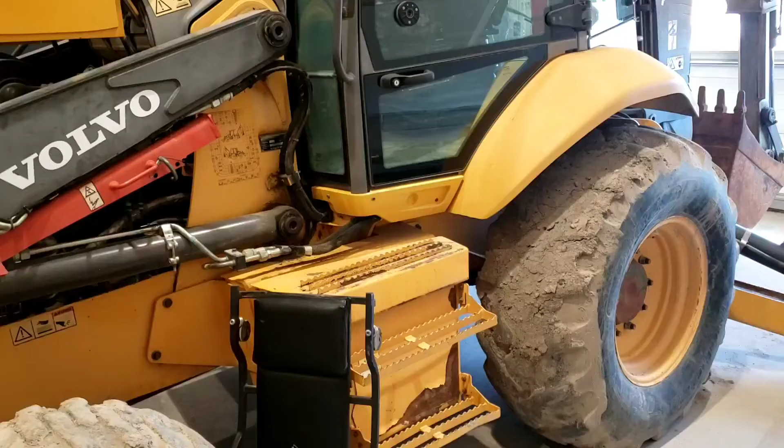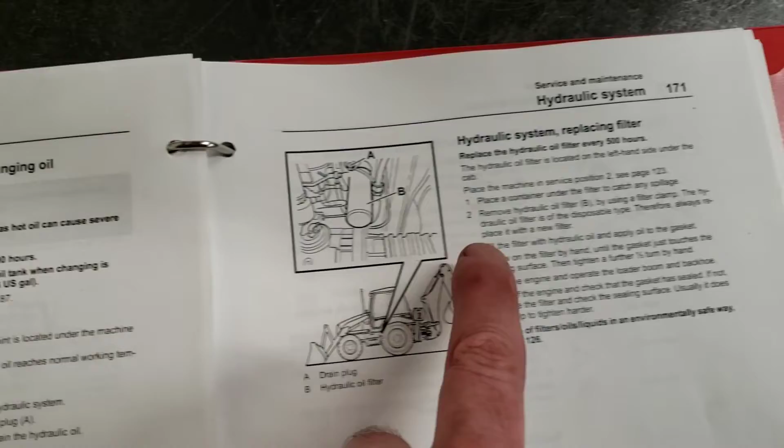So the machine I've got in the bay today is a Volvo BL70. While we're talking about hydraulic system maintenance on mobile equipment, I want to talk about oil and filter changes first. I'm looking in the operator's manual for that machine. It says to change the hydraulic oil every 1,000 hours, and then it talks about changing the hydraulic system filter, which is a spin-on element on this Volvo BL70.

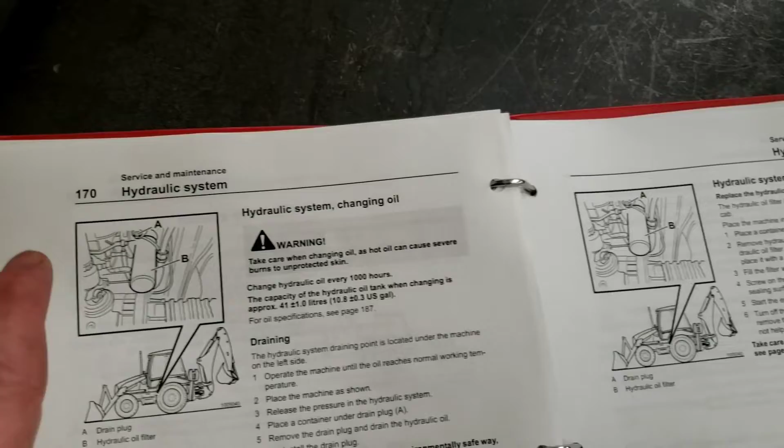It says to change that filter every 500 hours, so we're going to be changing the filters more often than the hydraulic oil. This is very common on mobile hydraulics, and quite often these are the intervals: you change the hydraulic filter every 500 hours, and every second filter change you're also going to dump the oil out of the tank.

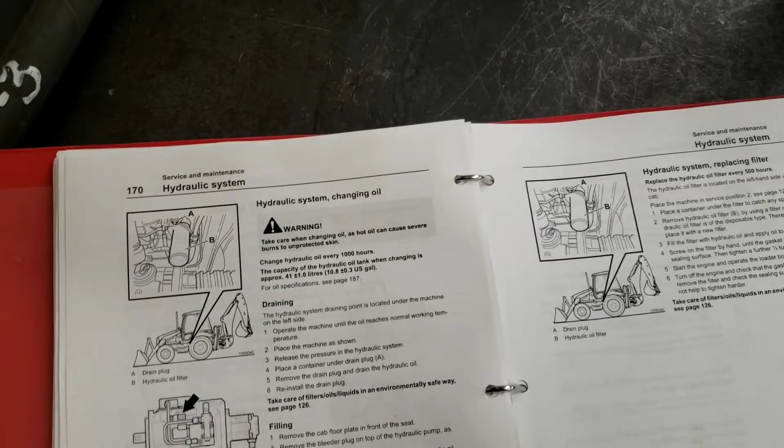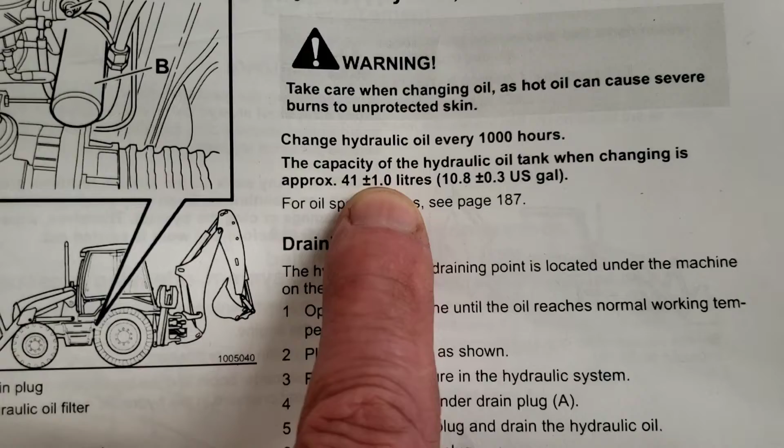Now, how much oil is in the tank versus how much is in the machine? The hydraulic tank has a unique setup on this machine - it's got an upper and a lower tank, but in combination those two only hold 41 liters of oil. So when we do that change at 1,000 hours, we're changing what's in the tank. We're not changing everything in the machine, because there's probably at least another 40 liters in all the cylinders, hoses, oil cooler, and the pump itself.

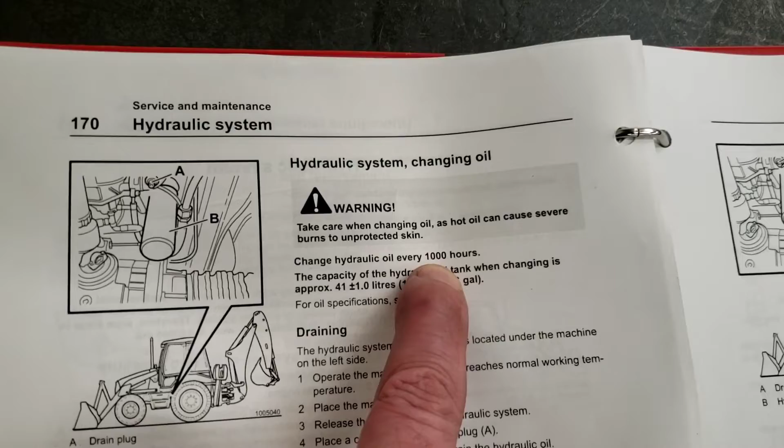So we're probably changing about half of the oil every 1,000 hours, and the objective there is that over the lifespan of the machine, the overall cleanliness of the hydraulic oil will be sufficient for long-lasting components.

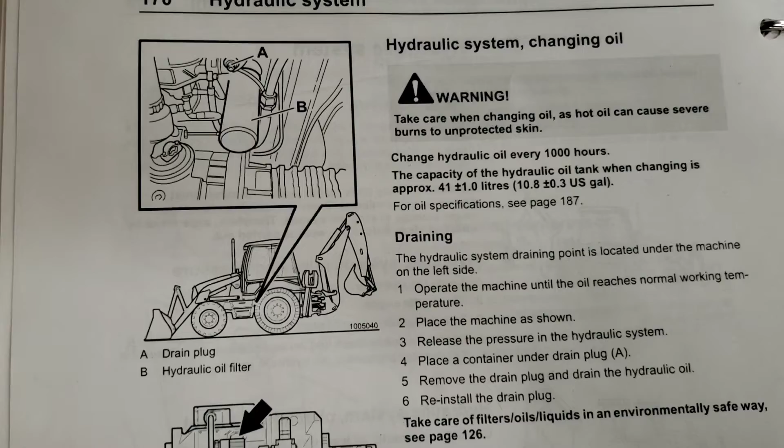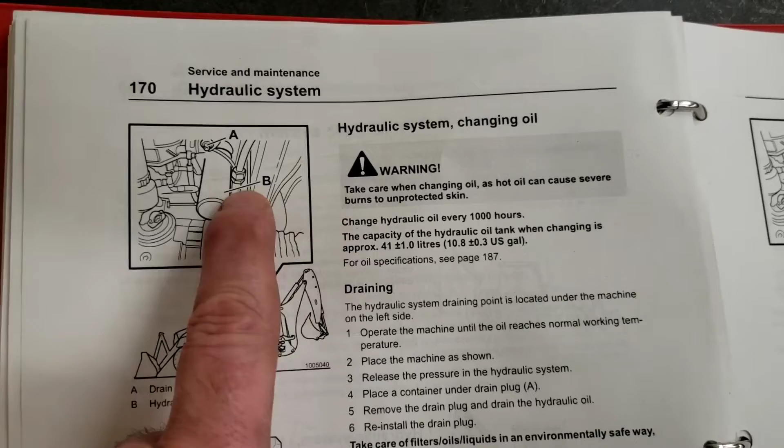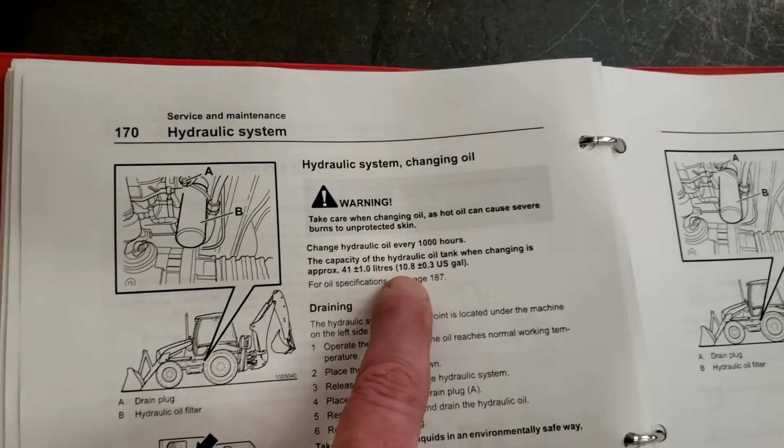Now, if you do scheduled oil sampling, your results may indicate that you need to change that oil more frequently, or you may get into a scenario where you'd want to run the machine after an oil change for a while, then maybe change it again. Because again, we need the oil to circulate through all the circuits, get back to the tank, and it's just by a process of random chance that a particular molecule of oil may end up going out during that change. But overall cleanliness with that maintenance schedule should be maintained.

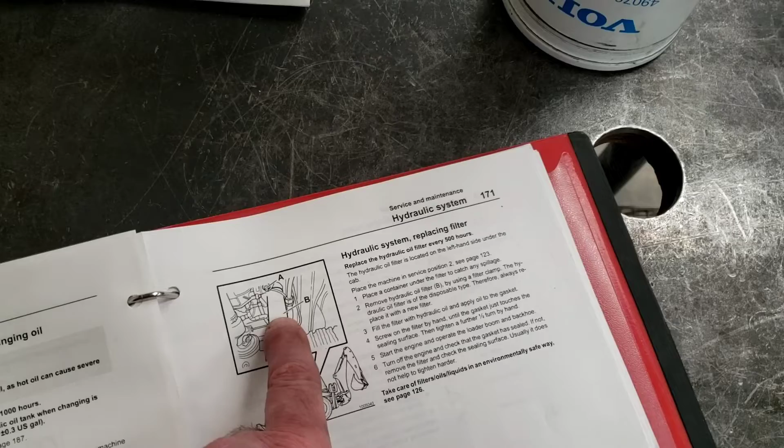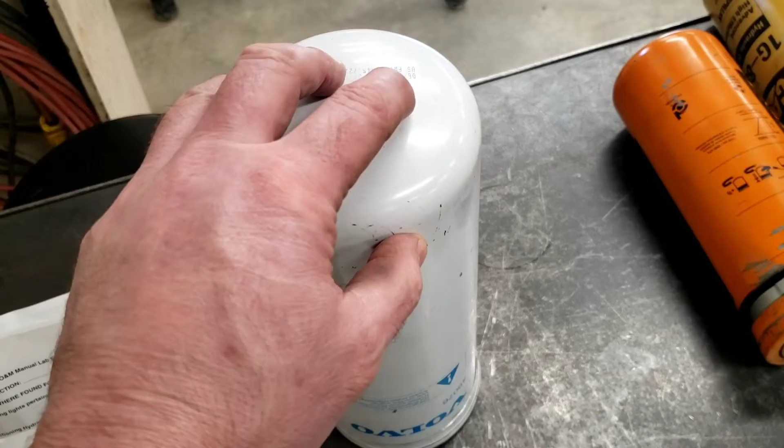Why are we changing the oil and the filter at different intervals? Well, this machine, our BL70, has what's known as a full flow return filter behind the rear axle underneath the machine. There's a spin-on element - I'm going to guess it's about a 40 micron element. It's designed to grab 40 micron and larger size particles, which are particles you can see with the naked eye.

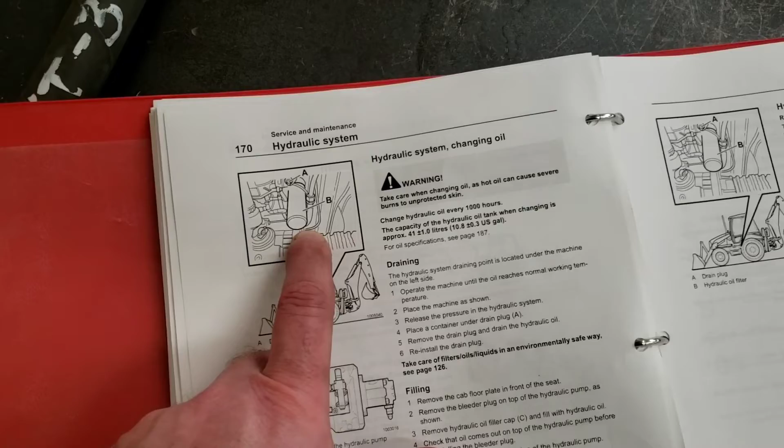So why are we changing the oil at all? Hydraulic oil actually doesn't wear out, and often when you are changing it, it looks pretty good - it almost looks like new oil you're draining out. The reason we're changing the oil at all is so we can get the particles that are smaller than the filter will catch out of the system.

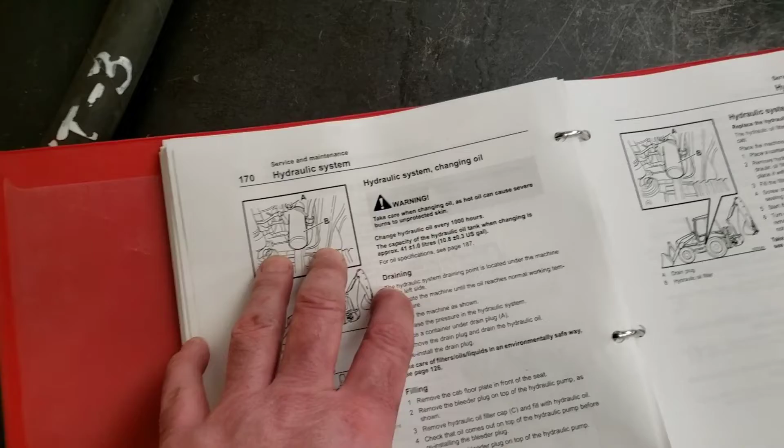So particles below 10 microns in size may do some damage in the system - 20 microns for sure, 30 microns. If the filter's only grabbing 40 micron particles and larger, it's not 100% efficient, it's not grabbing them all. But we've got to change the oil periodically to get rid of the smaller particles. So that's why we change the oil in a hydraulic system - to get rid of fine contamination.

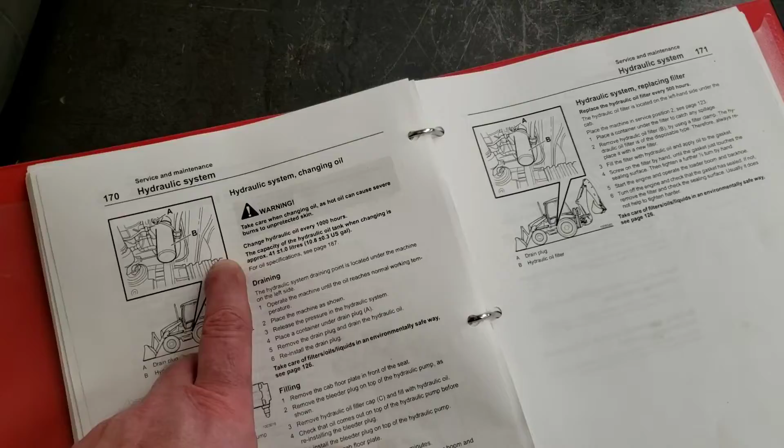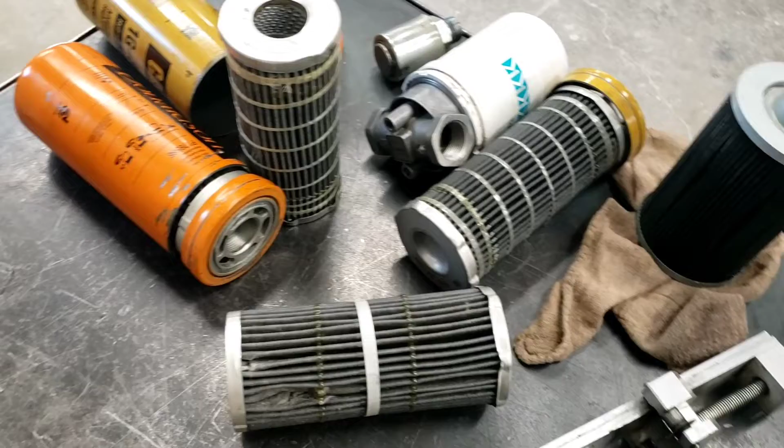So that's a good reason for doing oil sampling. I like to cut filters, use a filter cutter, and cut the old filters open to have a look on the outside of the pleats. I've got lots of filters I've cut open here, we'll look at in a second. But when we do that, we're looking on the outside of the pleats to see what's going on in the system - is there dirt and debris in the system?

Is there any shiny metal? We can use a magnet to figure out if we've got ferrous metals or aluminum, and we're going to look on the outside of the pleats and see what we see. But that's where we're looking for large chunks - if we've got a full flow return filter, we're looking for particles we can see with the naked eye.

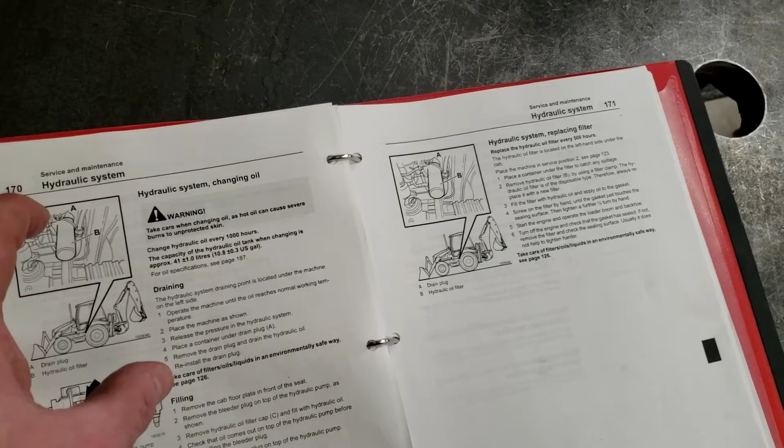Well, most oil sampling labs, when you send your sample in, the first thing they're going to do is run that through a 20 micron filter before they feed it to their machine that's going to analyze the oil.

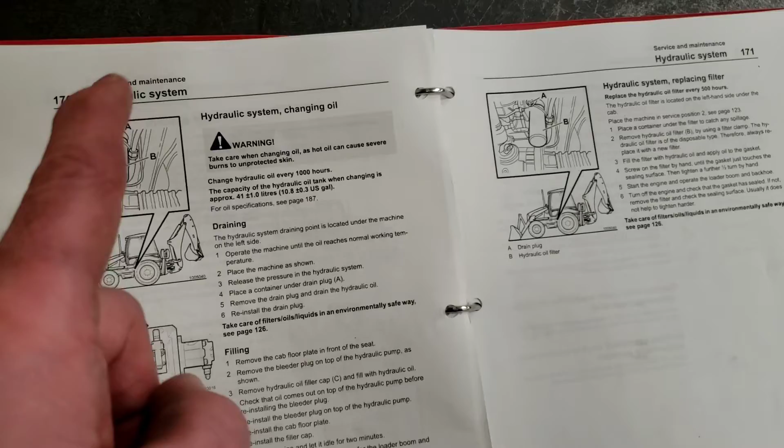Oil sampling is looking for small particles, and that oil sample report may tell you whether or not you have to shorten up your oil change interval. Whereas looking in the filter, you're looking for large particles that oil sampling is not going to catch. So one does not replace the other. I always recommend doing filter cutting and oil sampling. We're looking for big particles in the filter, and we're looking for small microscopic particles with oil sample reports.

Not all filters are full flow return filters like our Volvo backhoe loader uses. Here's a Caterpillar filter called a high efficiency filter, hydraulic oil filter. That's probably a 10 micron filter if we looked up the specs, and it probably isn't being used to filter all the oil returning to the tank like we're doing on our Volvo.

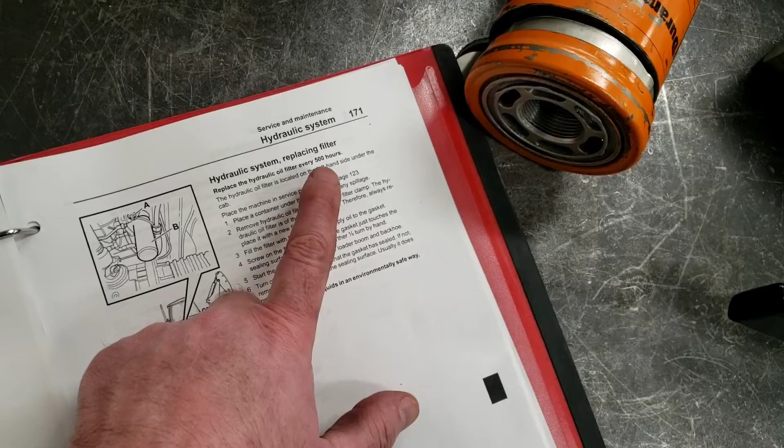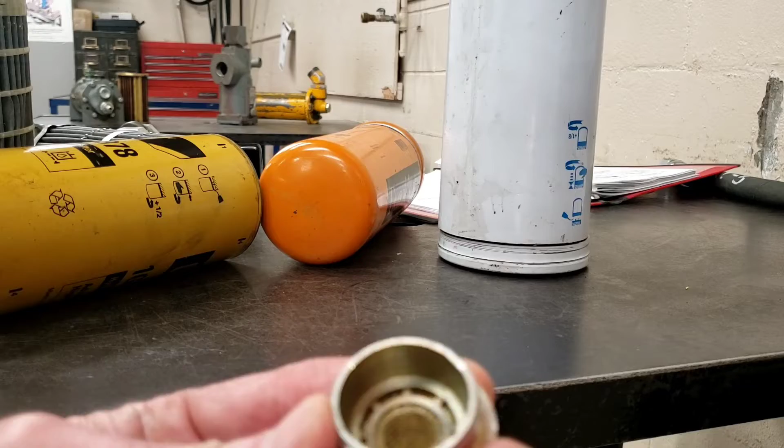Often a high efficiency or 10 micron filter will be used in a kidney loop system on the machine, where only one circuit's returning oil will be filtered at that smaller micron size. Because if all your return oil from the entire system went through a 10 micron filter, you're probably not going to make it 500 hours before you clog up that filter and it would go on bypass. So where you see finer filters on mobile hydraulics, you tend to see those in a kidney loop application. Where you see 35, 40 micron sort of size filters, you tend to see those in a full flow return situation.

Now you may also have some hydraulic filters that are just mesh screens. That may not be as obvious - that might be designed to maybe be serviced, or they may be an integral part of the machine that isn't designed to be serviced. That may just be designed to keep some debris out of specific areas of a system. So here's one that's just a wire mesh screen.

I've also got a pilot system filter off a John Deere tractor loader backhoe, and it's this style of filter that uses a sort of steel mesh inside, and you don't service it inside - you just take this apart and toss it, put a new one on. So sometimes the filters are unconventional looking, but may still have a service interval.

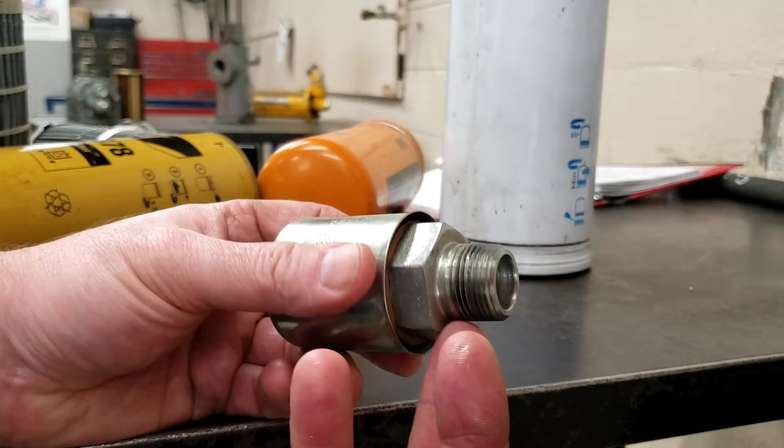And then another filter, of course, might be a breather. If you've got a vented tank or even a pressurized tank, there may be a breather in combination with a vacuum breaker and pressure relief, or if it's a vented tank, it may just be a breather like this, where the air coming and going as the hydraulic level changes in the tank has to move through this breather so we don't draw air in with incoming dirt in with incoming air.

On our BL70, instead of it being a separate breather like this, it's actually part of the cap, the fill cap on top of the hydraulic tank. But regardless, there's generally a service interval for this, whether you take it apart and change the element inside, or you toss the whole breather and change it. On the BL70, they have you replace that hydraulic tank cap. The breather's not serviceable within the cap - you just change the cap, and that's servicing your breather.

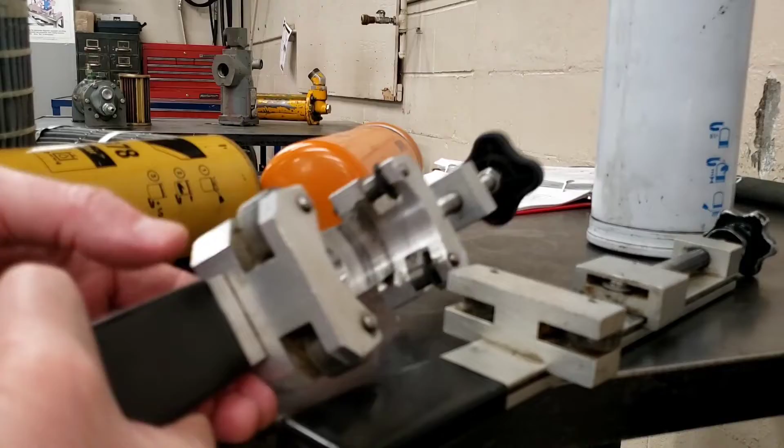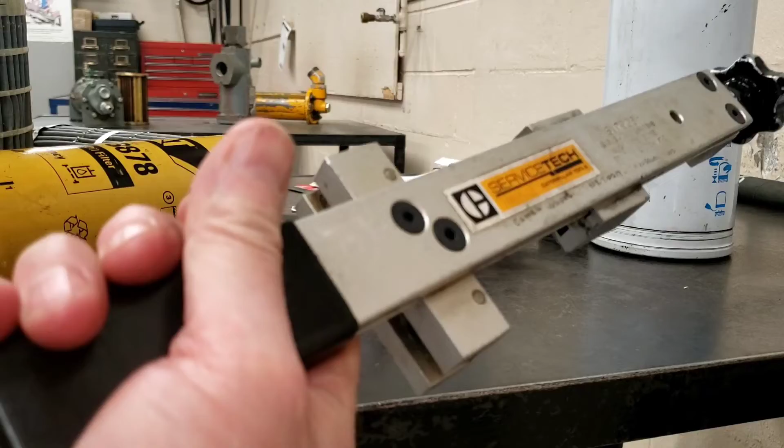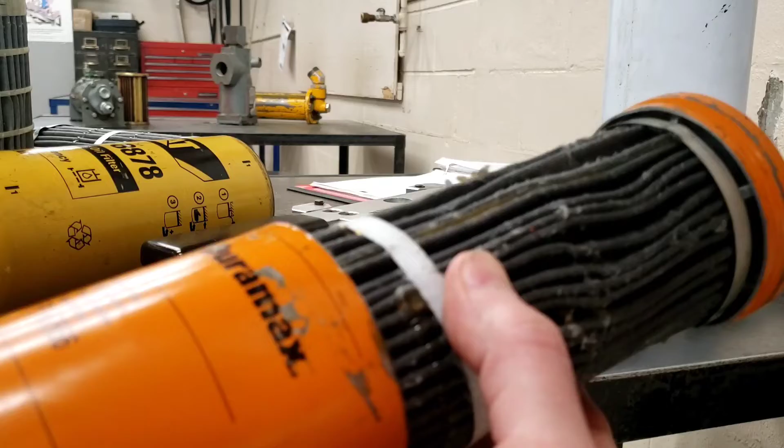When you cut open these cartridges, of course, some of our filters are not going to be a spin-on element. Some hydraulic systems use a cartridge that we would just install through a cover on the hydraulic tank or in a separate housing. But often there are spin-on types on more modern machines just for convenience. So I like to cut these cartridges open, or cut these replaceable filters open. Again, we'll find the cartridge inside, and we're generally looking on the outside of the pleats because the oil is going to get filtered from the outside in through a modern hydraulic filter. And we learn several things by cutting open hydraulic filters.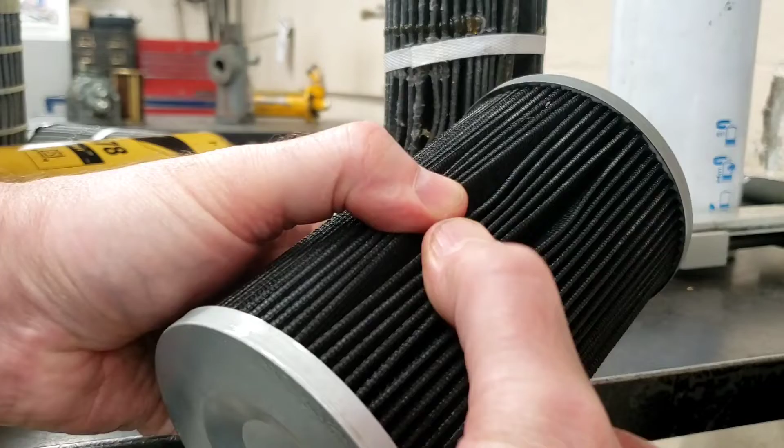We learn what kind of quality of filter we have. We can see how much pleat material there is, whether it's paper or synthetic or coated paper. We can see if there's any kind of wire mesh or screening over top of that filter material. We can see if there's glue being used to separate the pleats, or whether there's something more sophisticated like this spiral fiberglass band.

These two filters came out of this one says Donaldson, this one says Cat. They externally look very similar. They come out of the same filter plant, the FSI plant, and they're both made on the same production line, but you can see there's different levels of quality once you cut them open. So what fits may not be as good a quality of replacement.

You're really saving nothing by cheaping out on filters. If you look at the whole owning and operating cost of a machine, filters are this little sliver in the pie graph. Operator wages and fuel, and the purchase price of the machine, once you pare it all down, filters are a tiny fraction of a percent of the owning and operating cost of a machine. So trying to save a few dollars with an aftermarket filter rather than OEM is probably not doing you any favors.

So again, we're looking on the outside of the pleats for debris. We find out the quality by cutting the filters. We also get an idea of what's normal. If you're looking in the filters every time you change them, you get used to a certain level of alarm, when you see the odd flake of aluminum, or maybe a little bit of brass, or steel, or a couple flakes of paint. You'll know what's normal, and you'll know when to be worried and when not to be worried. It's good practice to get into.

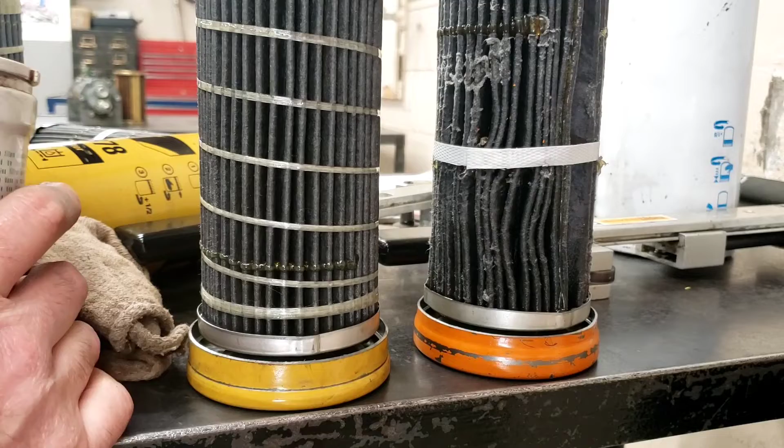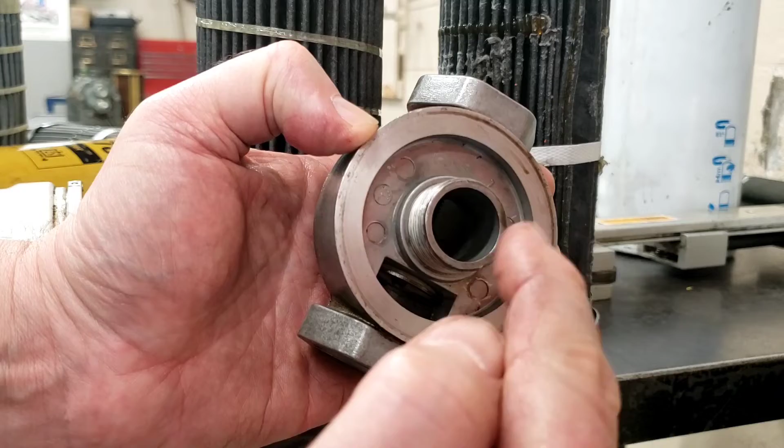So here's a hydraulics filter and its base, and of course oil comes into this system. Oil comes in this side, comes in dirty, comes through this port, goes through the pleats of the filter into the center tube where it's then clean, and then it comes back to the tank.

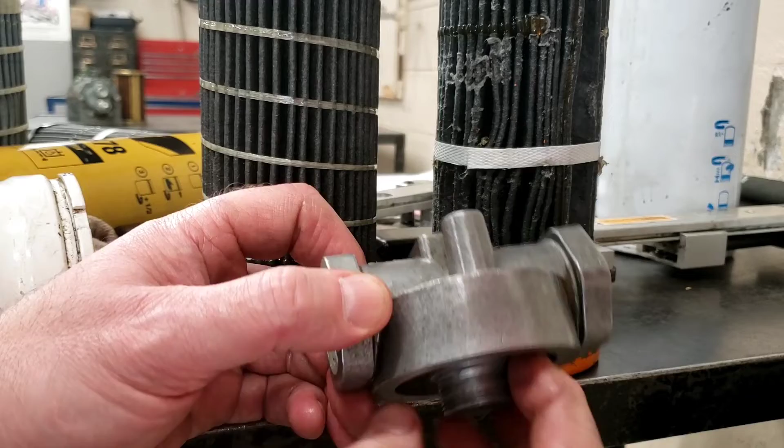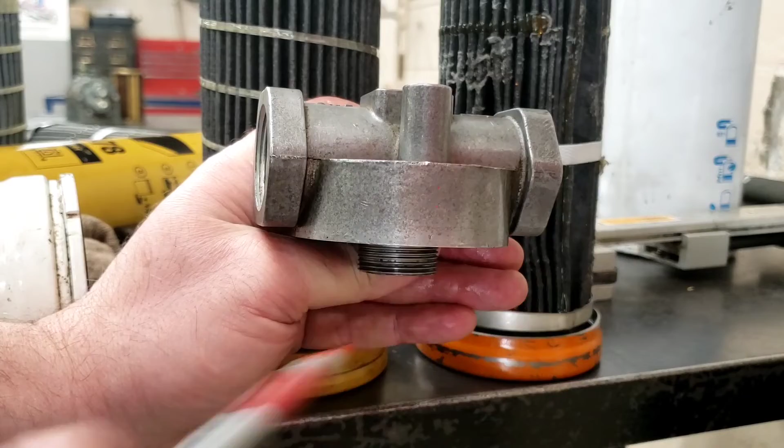So the oil's going through here, through the filter, back in through the tank, and in here is where we've got a bypass check valve. There's a spring-loaded disc in there, and if the restriction through the filter is too great because it's plugged with debris, or because the oil's cold on a cold winter morning and can't go through that filter medium, it can push against that spring, open up this bypass check valve, which is kind of a relief valve, and the oil can then go through the filter head or filter mounting uncleaned, unfiltered.

Big benefit to that, rather than having a bypass down in the bottom of the filter like an engine oil filter might have in an automotive application. In this style, if debris trapped by the filter drains down into the bottom of the canister overnight, then at startup, when the bypass opens, it's not going to blow all that debris through the system like an engine oil filter may. So it's a little better design to have it in the base.

Some automotive engine oil filters are going to that style as well. But if you cut open an engine oil filter, you're typically going to see a bypass check valve. Again, if you're not buying OEM filters, you might be buying a will-fit that would have a bypass valve in it, which wouldn't necessarily be the best thing for your hydraulic system.

It's time well spent, the 2 or 3 minutes it takes to cut open a filter with a proper filter cutter and see what's going on in the system, get used to what's normal in there, and look for dirt and debris above the size particle you can see with the naked eye.

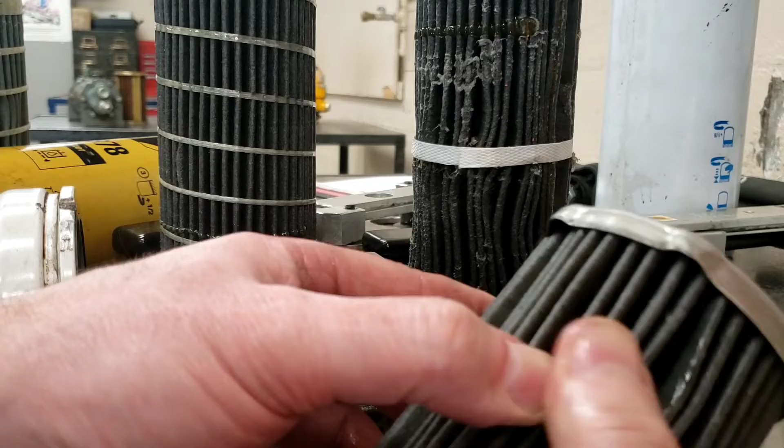If you're just removing a cartridge type element out of the hydraulic tank, it's generally not too difficult. Sometimes taking a sharp utility knife, cutting out a section of filter and letting it dry will give you a better idea of what you can see in the pleats. The first thing we're looking for is lots of metal or anything that looks shiny like a jewelry store. We don't want to see that.

On the topic of quality, I've got another Donaldson filter that I opened up this week, and I was surprised to see that at the factory, they hadn't put the glue all the way around. We can see there's some pleat bunching going on here. I like the better quality filters from that plant that have a fiberglass band glued on. But on this one, probably only 3 or 4 pleats were doing the majority of the filtering. Around this side wouldn't have been the path of least resistance for the oil. So again, you get a good idea on quality control.

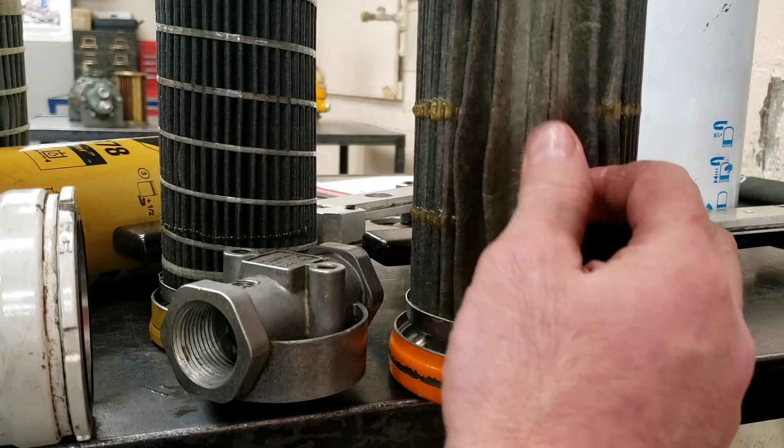It looks like it was glued that way. I'm not sure if this is intentional - I can't understand how it would be. I think the machine messed up on the installation of this filter, and then it poured the glue in there and glued it, but in this position. So there's some quality control issue on that particular one.

Assuming it's legit - I don't know if there are counterfeit filters out there.

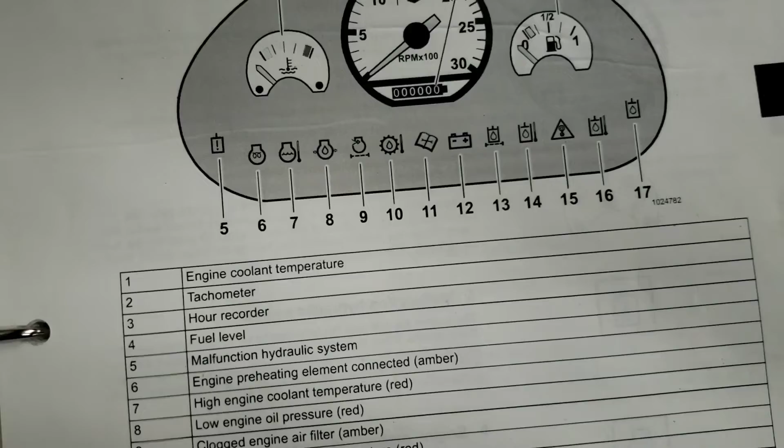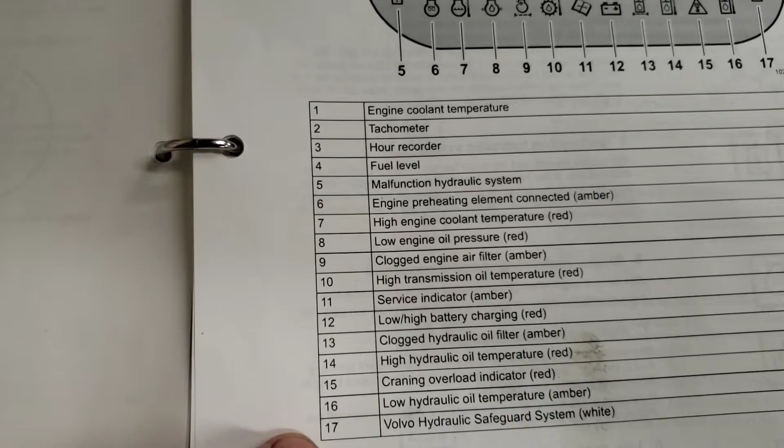This particular Volvo backhoe loader also has a filter bypass indicator symbol on the warning panel on the dash, as well as hydraulic temperature warnings and hydraulic malfunctioning warnings, cold temperature, hot temperature, oil level. Lots of warnings on this machine pertaining to the hydraulic system.

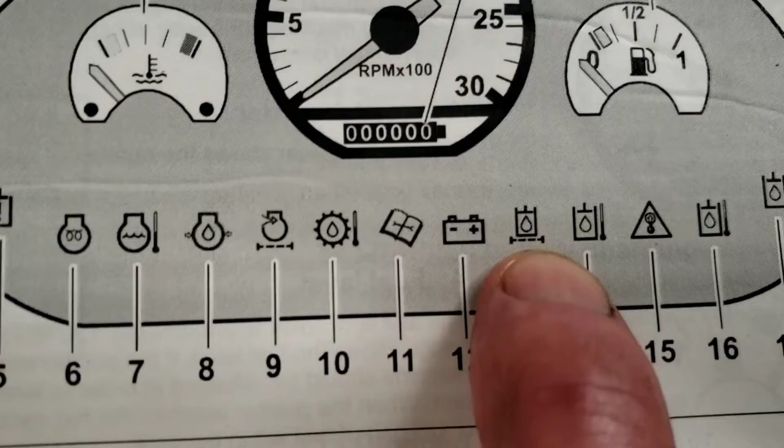On the filter base of this machine, there's a switch - I'm not sure if it's a mechanical switch tripped by the bypass valve in the filter, or a pressure differential sensor measuring upstream versus downstream pressure at the filter, but it's going to tell the operator that the filter's on bypass or bypass is impending. I'd have to read a little deeper.

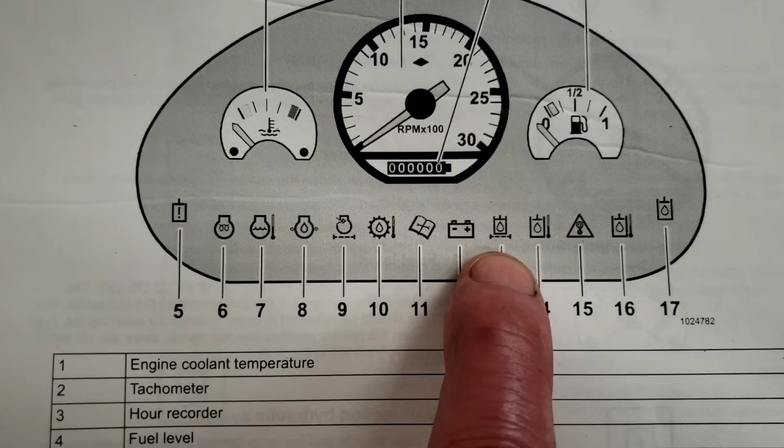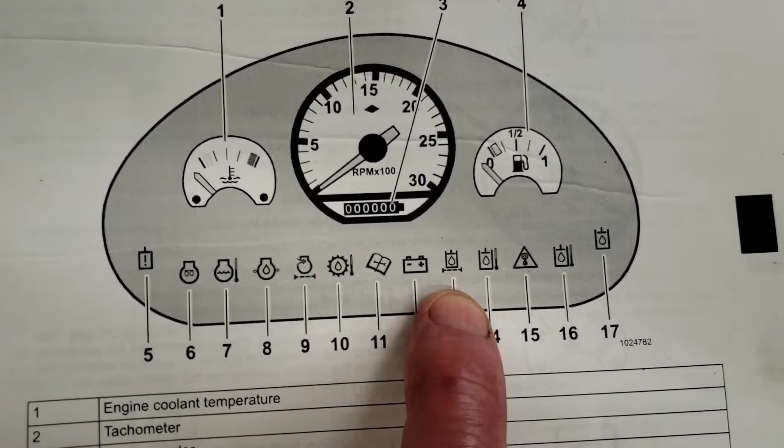Some manufacturers tie that warning in with a hydraulic temperature indication, and they may not give you that warning if the oil's cold, because sometimes we expect that filter bypass to open when the oil's cold and thick and won't fit through the medium of the filter. To prevent a nuisance warning, sometimes they'll put a switch in series with a temperature switch, and once the system's up to operating temperature, if you get that bypass indication, it's an issue.

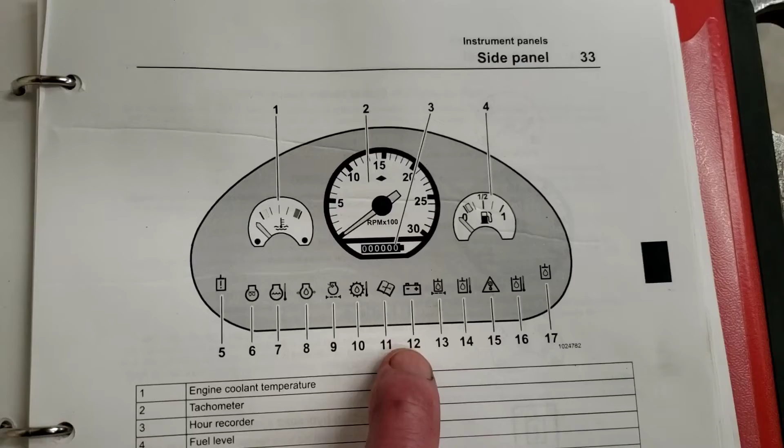You'd have to read the operation maintenance manual for each particular machine to see what to expect with that light. Some machines, the light might come on every cold morning, and it might say in the verbiage that it's not something to be concerned about if it goes off once the oil warms up.

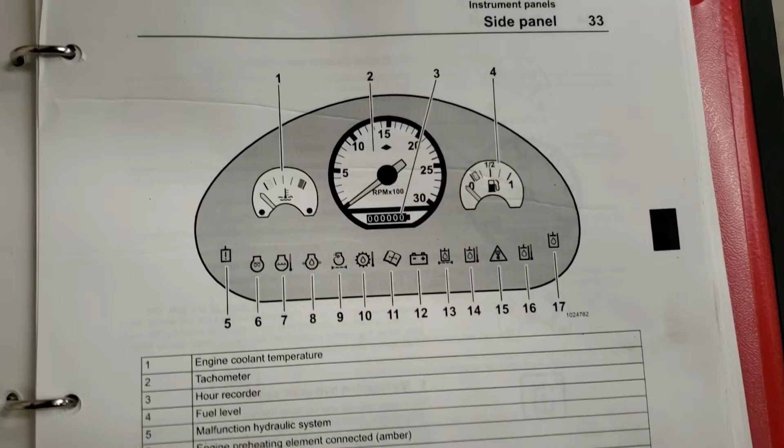A common complaint is that the filter bypass indicator isn't on when the machine's cold, but once the machine warms up, the light comes on - and that may just be the strategy of the machine. It may have been on bypass the whole time, but you may only get the warning once the system detects it's approaching operating temperature.

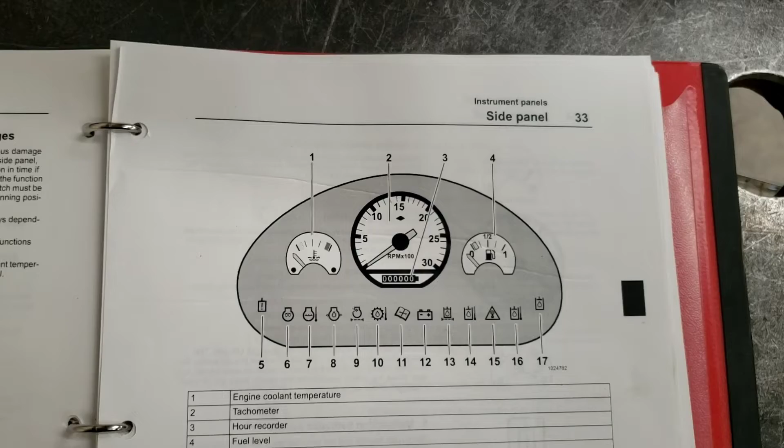So I'm just going to slide underneath the machine here and have a look at where the oil filter lives for the hydraulic system. A creaky creeper - so we're actually back underneath here.

Here's the rear axle of the machine. There's the right rear tire, and there's our filter base.

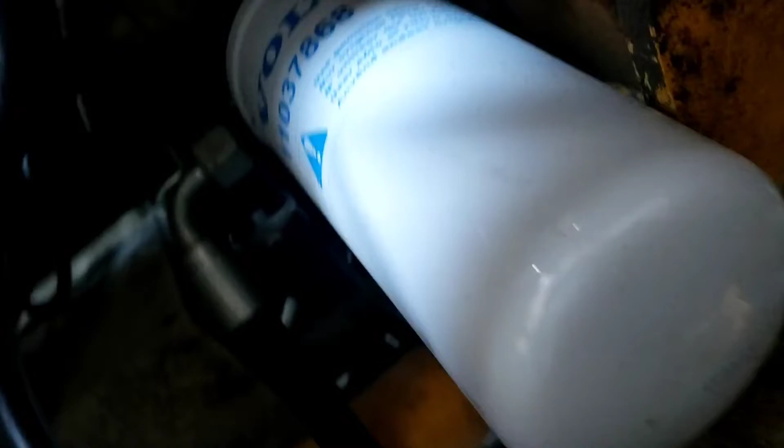And again, I see wires going up on top. There's a Deutsch connector up there. There's some wiring to the top of that filter base for whichever type of bypass indicator there is on this filter.

But like a lot of tractor loader backhoes, the filter's in kind of a vulnerable spot. This one's actually a little better than some I've seen because it's tucked in behind the axle, but it's still a vulnerable spot. If the operator gets the machine buried, they can damage this filter.

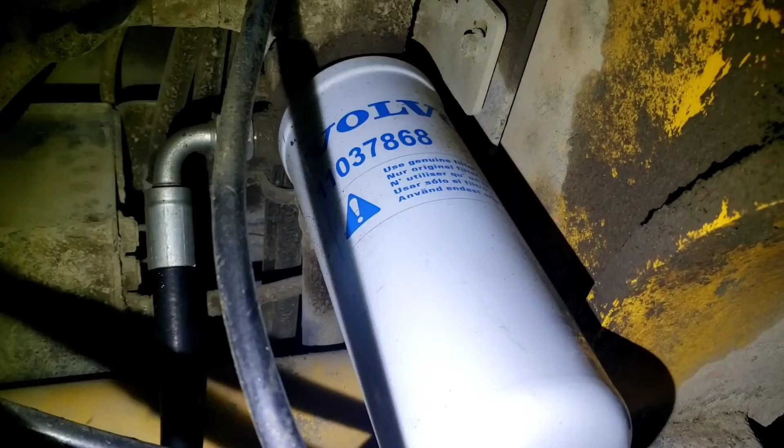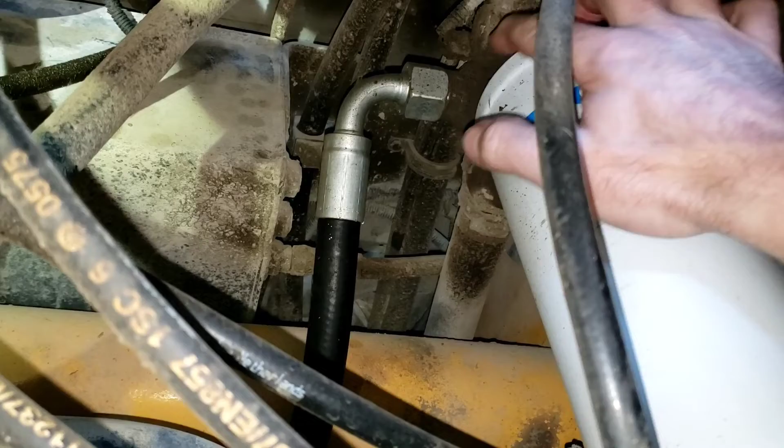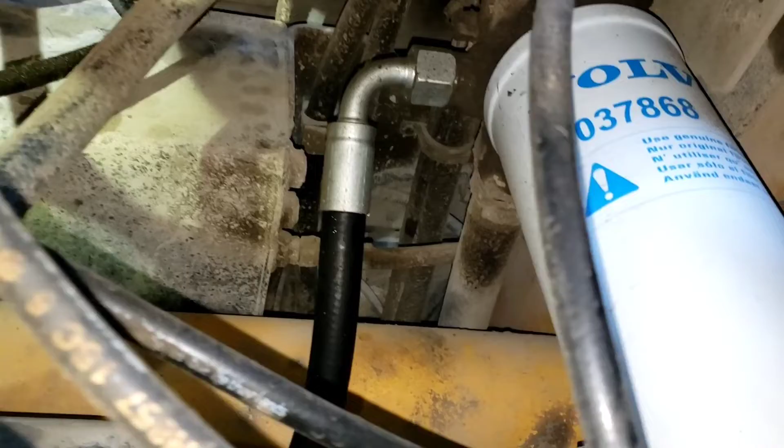One of the most common issues with these filters is improper installation. People love to over tighten these filters, which can cause the filter to leak. I've seen them tightened so much that the crimp where the filter can crimps onto the filter head will actually turn, because someone's over tightened it so much that the filter's not threading on anymore - they're actually starting to spin the outside can. So you don't want to over tighten these. Follow the instructions for installing the filter properly.

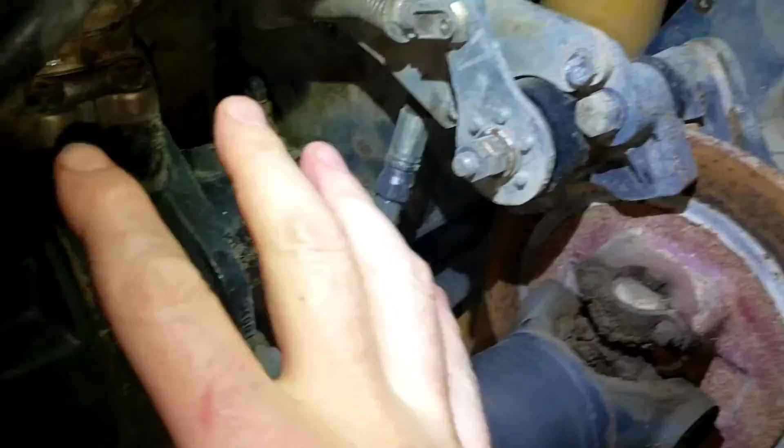Again, this machine's a little unique in that it's got two hydraulic tanks. It's got a lower tank down here that's sort of underneath the cab floor. So there's the pump - I've just moved up in front of the rear axle here. The pump is here, and there's a tank down here, with a suction line to the pump. So this is a flooded inlet to the pump - the pump is lower than the hydraulic tank, which is a nice design for preventing cavitation.

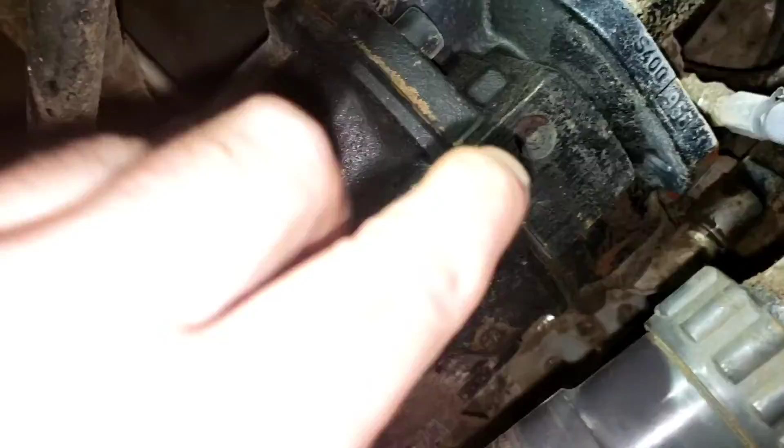This machine's got a Rexroth axial piston pump. But then coming off of that tank, I've got another large suction line that runs up in front of the transfer case of the transmission, and that hose takes a 90-degree turn and goes up - I'll show you where the upper tank is. So up in here behind the engine, you see where my muffler is, etc.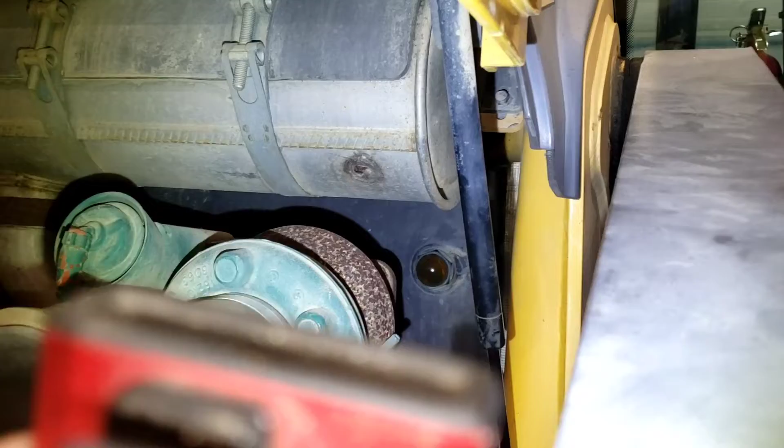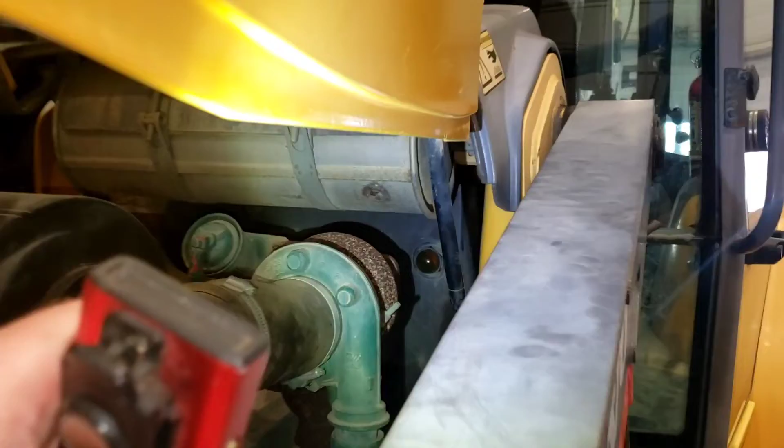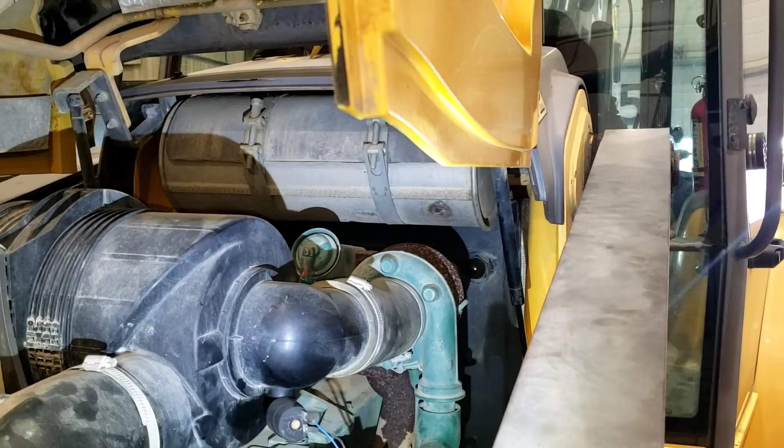Back behind the engine, there's the upper tank. It's got a sight glass on it. It's not the most convenient spot - you got to lift the hood here to get to that sight glass, but there is a sight glass. Probably because that isn't that convenient, they've also put a warning level switch in the tank that triggers a light on the dash if the level gets low.

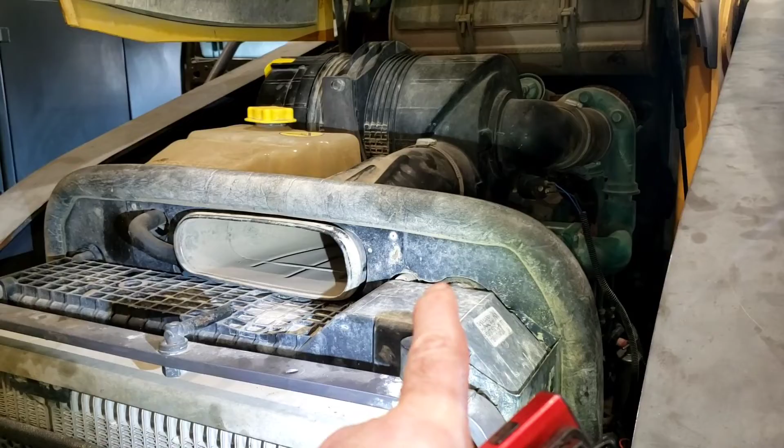And then up at the front of the machine here, we've got a hydraulic oil cooler, sort of in between the engine rad and the air conditioning condenser. There's instructions for cleaning that cooler out in the operation and maintenance manual if the hydraulic system is overheating.

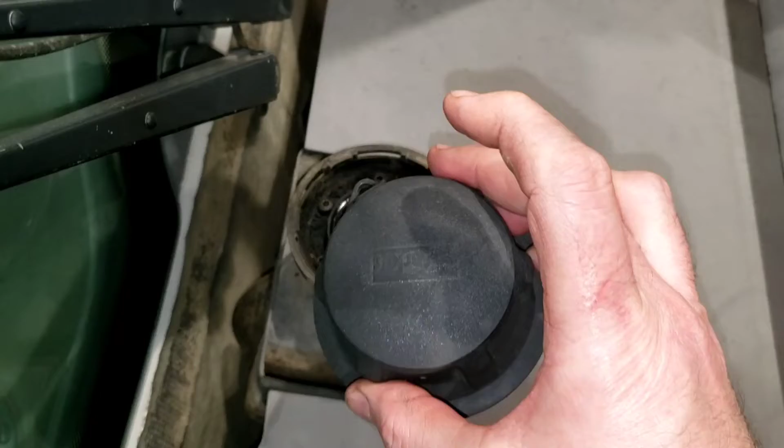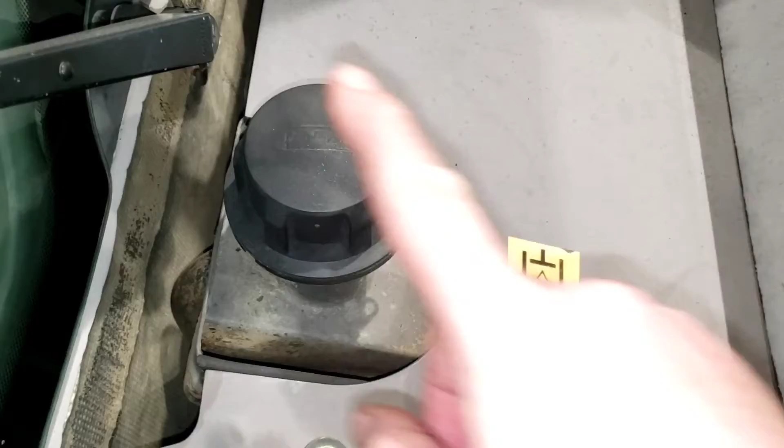And then here on top, just in front of the front windshield behind the hood, this is where our hydraulic fill is. And this is our hydraulic tank vent that gets changed - I think it's every 500 hours I recommend changing that cap to change the hydraulic system breather. So you're maintaining the level of the upper tank, but there is a lower reservoir as well before the pump.

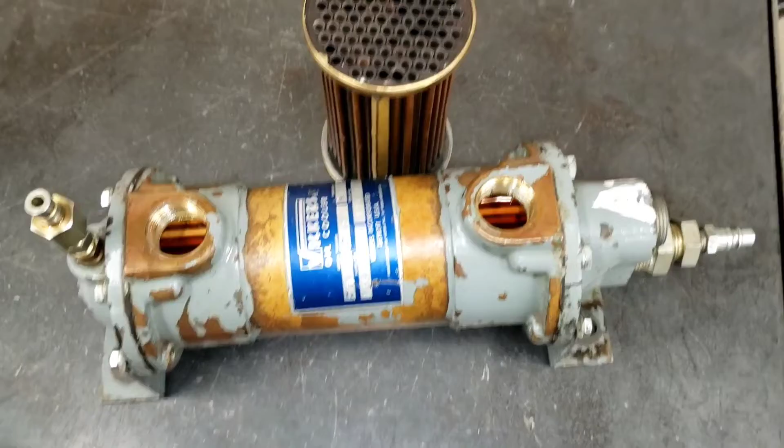So that BL70 is using the more common radiator type hydraulic oil cooler, where you've just got an aluminum rad, and the airflow that's moving through the engine radiator and the air conditioning condenser is also moving through that oil cooler to blow away the heat.

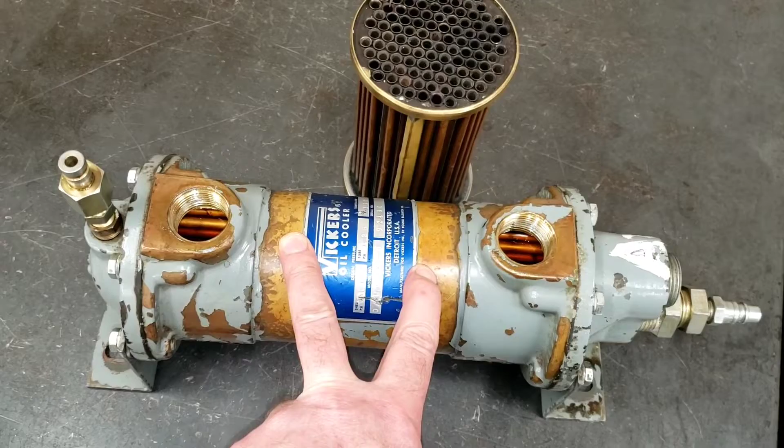But some machines, if I brought in our John Deere 310 SK tractor loader backhoe, we'd find it's got a cooler that looks more like this, where it's a heat exchanger with a bundle of copper tubes inside. These are the oil connections on this particular one. Over here I've got the coolant connections, so engine coolant will go through the center of the tubes, and hydraulic oil will go around the copper tubes - copper is a very good conductor of heat.

So whoever's hotter between the hydraulic oil or the coolant will transfer their heat energy to the colder of the two fluids to stabilize the temperature. This type of cooler, I believe, is used on the John Deere 310 SK just because it's got a Tier 4 emissions engine. There's so much stuff packed under that hood, plus an air-to-air aftercooler core, etc., that they've just run out of room at the front of the machine for another radiator.

So this is mounted on the frame rail underneath the machine, and they transfer hydraulic heat energy into the engine coolant, then force the engine radiator to deal with that heat as well as the engine heat. Big advantage to a heat exchanger type cooler, though, it can actually warm up the hydraulic oil.

If I took that BL70 we just saw and parked it outside on a cold morning and let it idle, the hydraulic oil is never going to warm up. It's actually going to cool down because I'm blowing air across the hydraulic oil cooler. Whereas this type of cooler, because the engine's thermostatically controlled, the copper tubes can transfer some heat energy from the coolant into the hydraulic oil and start to warm it up a little bit. So it's more a heat exchanger rather than just a cooler.

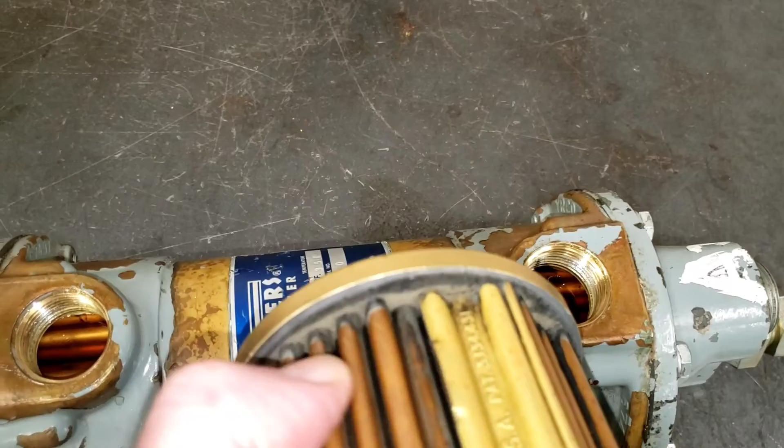But you've got to be careful with these types of coolers on a hydraulic system, because they can leak. The solder joints where the bundles of tubes are soldered in, if they start to leak, we can get hydraulic oil and engine coolant mixing. That isn't going to do a lot of harm initially to the engine cooling system likely, but having antifreeze in your hydraulic system can cause an issue.

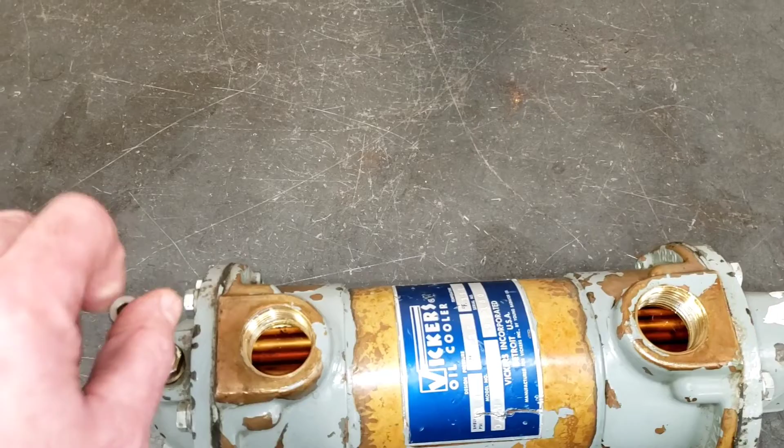I've got this one set up for pressure testing to see if we pressurize the inside of the tubes, there's a maximum pressure rating on this one of 125 psi, so we can put shop air pressure inside the tube. The way I've got this fitted up, I put a gauge here, the shop air line here, and with this full of oil, I can watch for bubbles to let me know if I've got any leakage. But if that leakage is happening, you can contaminate your hydraulic system with coolant.

And that's again where oil sampling is a good idea. If you've got potassium or sodium trending up in your oil sample, that can indicate that you've got engine coolant getting in. Of course, you've got to be careful that you don't want to blame the cooler until you do some investigation - it could have been someone using a funnel for the engine coolant and then using it for the hydraulic system. But if it's a trend that's going on and worsening, it could be an indication of an impending failure of the cooler itself.

They can be rebuilt, at least this style can. Some can, some can't. So that's just some information about maintenance of hydraulic systems.

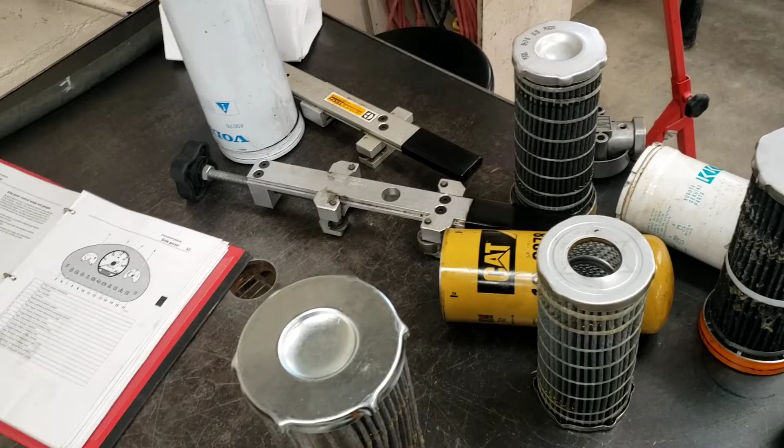We tend to follow the operation and maintenance manual to the letter on these machines - use OEM filters, cut the filters, do oil sampling. And if you do have dirt contamination trending high on an oil sample, or you're seeing contamination in the filter, then start to look for where that dirt might be getting into the system.

Check wiper seals and look for leaks on hydraulic cylinders - that's a very common place for dirt ingression into the system. Look for proper installation of the cap on the hydraulic system. If it's a pressurized tank, make sure that pressurizing system is working properly. But as a general rule of thumb, if you've got dirt coming into the system, you're going to have oil leaking out somewhere, so look for those spots where your hydraulic system might be leaking and correct those.

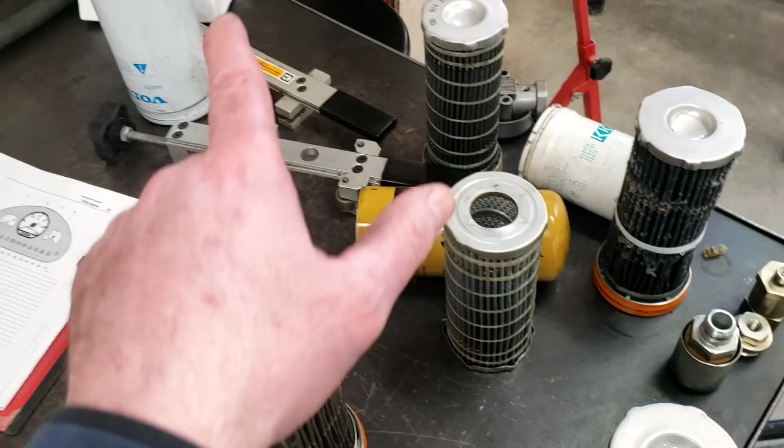If you do have dirt in the system, sometimes on a machine where you've got a full flow hydraulic filter - a 40 micron or 35 micron filter - you may be able to cross-reference that to a 10 micron filter that will fit the base. I know Caterpillar has a reference for what they call clean-out filters, and that document is just a reference showing you what 10 micron filters will fit where 40 micron filters were originally.

And those can be put on for short durations to help clean out the system. You can run it for a shift or two shifts, or until the bypass indicator comes on if equipped, to help clean out a contaminated system that way. But you're probably going to want to shorten up the oil change intervals as well, to get fine contaminants below even what a high efficiency filter can grab.